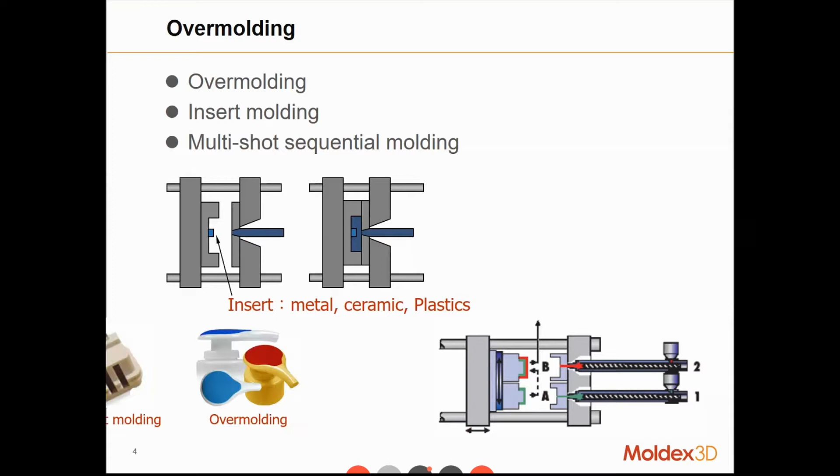Okay, so now let's swing straight to the introduction. So overmolding. In plastic injection, there are actually several nouns: overmolding, insert molding, multi-shot sequential molding. So overmolding normally refers to a plastic part that is injected to cover, or let's say on, another substrate, which is also plastic.

And as for insert molding, normally it refers to a plastic part covering or encapsulating another metal insert. And multi-shot sequential molding is multiple injection that is done continuously to combine two or more components together inside the mold. So strictly speaking, these three are a little bit different.

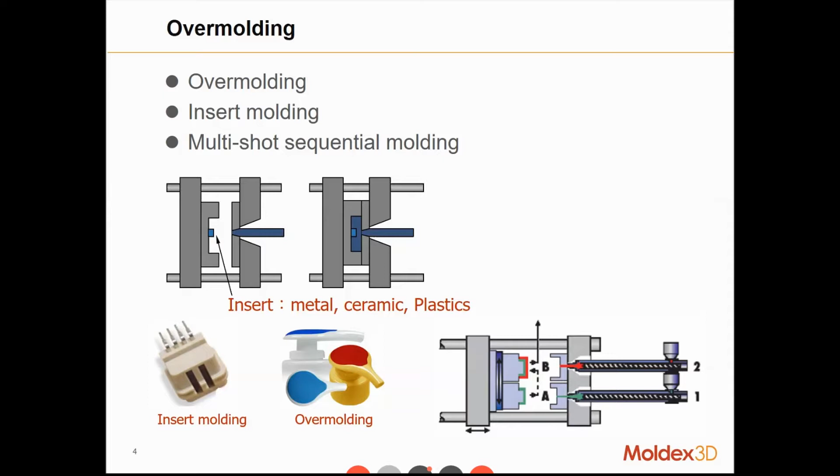But actually, there's also another general standard saying that overmolding actually covers insert molding and multi-shot sequential molding. So for today, we'll be using a little bit more general standard. We'll focus on the plastic substrate and plastic injection. So plastic with plastic insert. Okay.

So now let's take a look at some general examples of multi-component molding products, or let's say overmolding products. So first of all, consumer products like shavers and cosmetic packagings, the bottle of the shampoo, shower gel, all these things that you'll see. And to some bigger parts like the automotive components, the door handle of our cars,

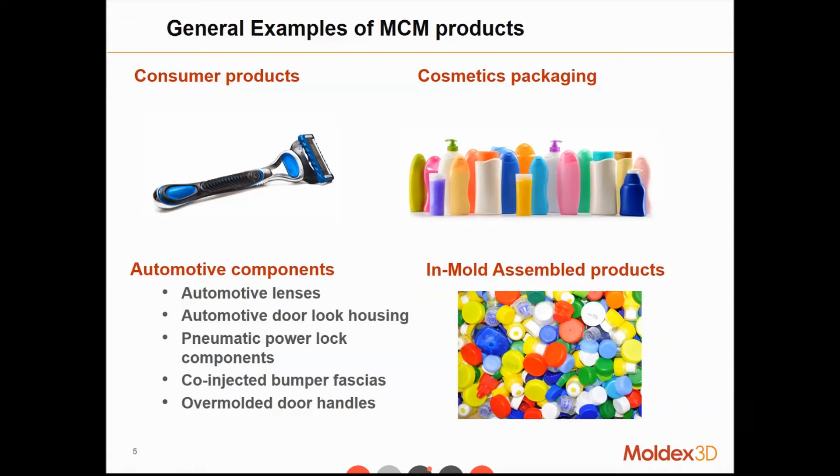maybe our front lamp, and then some in-mold assembled products. It can be medical products, or it can be the toys for our children. Okay, so all these, a lot of our daily objects, they are manufactured by an overmolding process.

So some pros and cons about overmolding. So a good thing about it is it gives us a shorter production time because it reduces the secondary operation. So we don't need manual assembly work. So it also at the same time reduces our labor cost. So it saves our cost money-wise and also time-wise.

And then since we assembled the part inside the mold, it can create a stronger chemical or mechanical bonding between two materials. So if the materials are suitable, they can be remelted and create some chemical bonding. If not, then we can combine them mechanically.

And finally, an overmolded product can give us a better product performance. So for example, let's say it's a screwdriver, and with a rubber-like overmolded part, we can have a better grip of the screwdriver. So it can significantly improve the product performance and make it more user-friendly, easy for our daily job, etc.

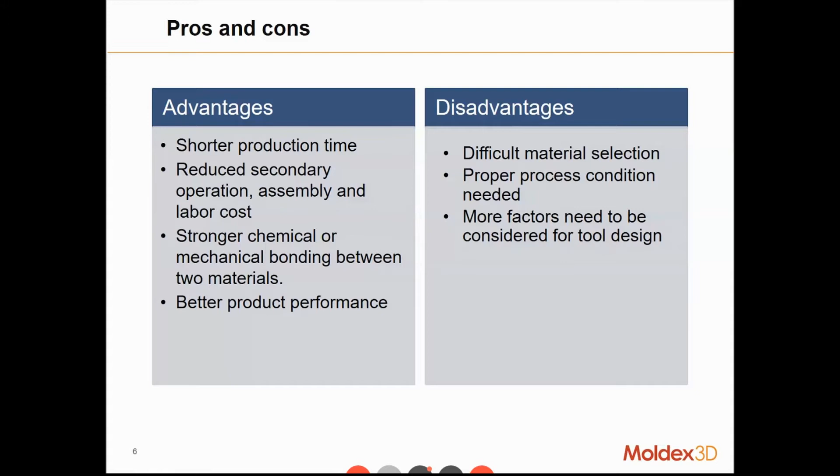So with all these difficulties, sometimes it can be difficult for manufacturers or designers to design and manufacture the product simply based on years of experience. Sometimes it's still very difficult, which is why we need software to help us predict and simulate and perhaps come up with a possible solution for our design. Okay, so which is why we'll go to the Moldex3D MCM module.

So the Moldex3D MCM module has a powerful pre-processing tool for analysis. It has a fully automatic, or semi-automatic, meshing tool, and also the process setup; the whole workflow is quite simple. And then it supports multi-shot analysis, so it's for overmolding, or sometimes more like 2K continuous injection. These we can consider, and no matter if you have a plastic or metal insert, they can be considered in our module.

And after the simulation, we have a remelted zone display that helps us to know what the temperature does to our substrate. And if we need to consider the fluid-solid interaction between the part and our insert, the substrate, we can also run a core shift analysis. So this enables us to know what the second injection does to the first part, whether it's going to cause deformation for our substrate. And finally, we can consider the orthotropic material property.

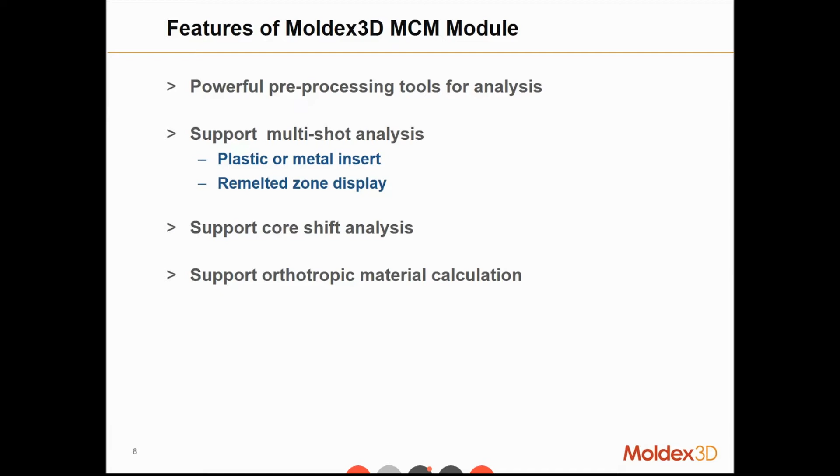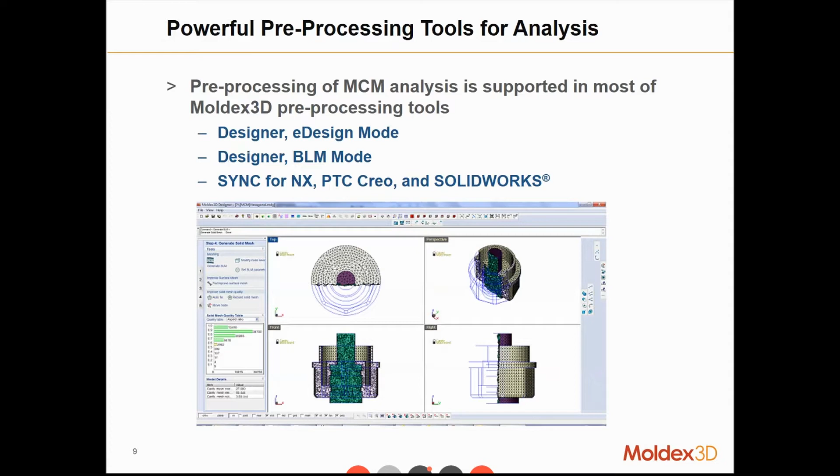So let's take a look at the details about each point. Number one, we have a powerful pre-processing tool. If you already know something about Moldex3D, we have different meshing tools. We have eDesign and BLM, boundary layer mesh, and both meshes support the multi-component molding, overmolding process. And if you want to do the pre-processing in your CAD software, the SYNC for NX, for SolidWorks, for Creo, they all support multi-component molding. And the whole workflow is pretty user-friendly and very straightforward.

So when we talk about the meshing part, for overmolding, we have Moldex3D non-matching mesh technology. So for your insert or substrate, the surface mesh and solid mesh don't have to be completely matched with your part or your second shot. This non-matching mesh technique can significantly reduce our meshing time, because if your product design is very complicated, it can be quite difficult to completely match the insert and the part. We do have an automatic matching technique, but for an extremely complicated part, especially in some small feature regions, it can be difficult to completely match everything, which is why we have this non-matching technique to shorten the pre-processing time.

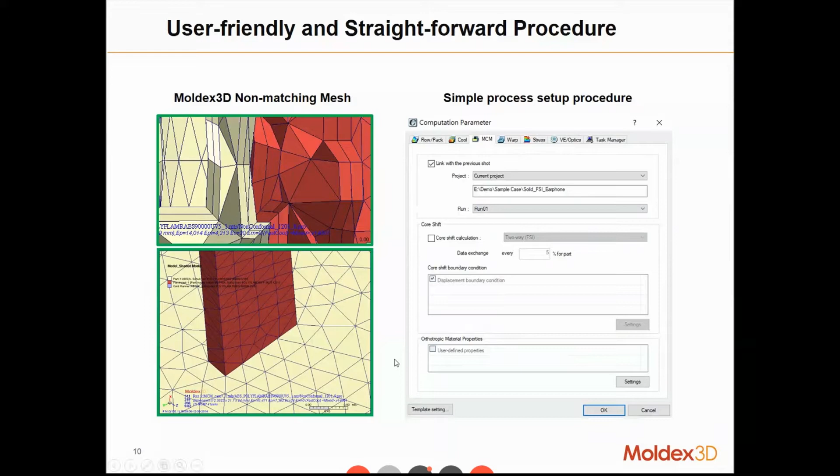And also in the process setup, we have one single window for the MCM process, so we can easily link the multiple shots. We can link the second shot with the previous shot, and we can get the data from the previous shot. Later on we'll have a little bit more detail about this point. And if you want to run core shift, it's also in the same setup page. So the whole workflow is quite simple. You can basically set up the MCM process in just one single platform.

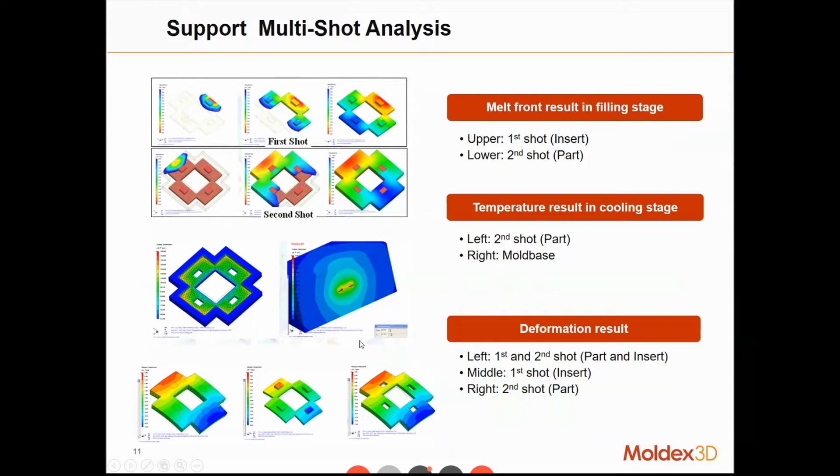So like I said, the MCM module supports multi-shot analysis. For filling, we can simulate the filling behavior and the flow pattern of our first shot, and then continue the second shot with the already made analysis as our insert for the second shot. Sometimes we'll be able to observe a little bit of flow difference with or without considering the first shot. And not just in filling, also in the cooling stage, since we can get the temperature result of the first shot, we'll be able to spot some temperature difference in the part and also inside the mold base in the cooling analysis. And finally, since we have a different filling pattern and different temperature, in the end we can see a little bit of difference in the deformation, the warpage result.

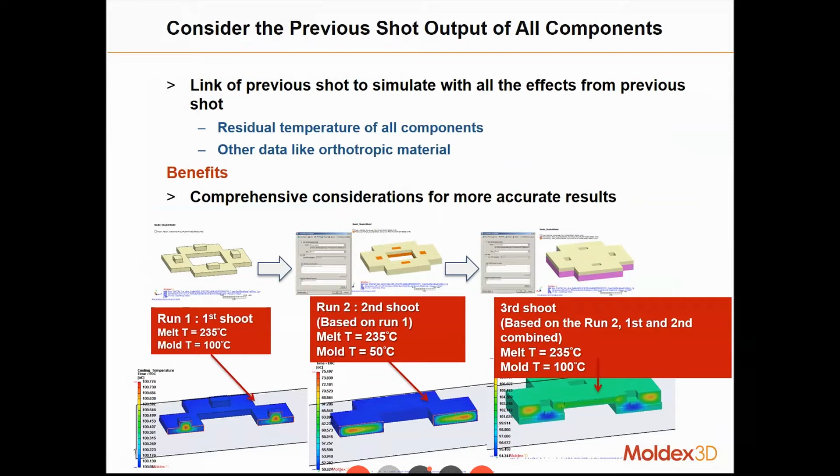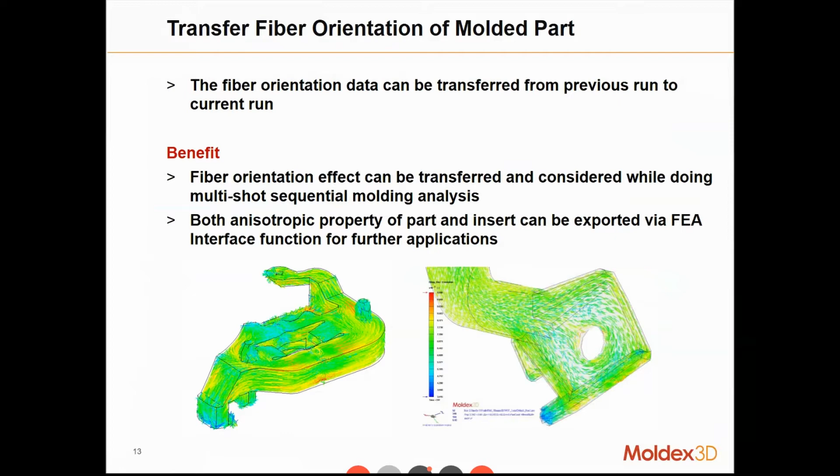And not just the temperature, but if you have some orthotropic material property, like different modulus in each direction, or if you're using a fiber reinforced material, the fiber orientation can be passed on. In the next page, I'll show you. The fiber orientation result can also be transferred to the second shot. These might later influence the deformation of the whole part after the part and the insert, the substrate, are ejected from the mold. And then both parts can be exported into FEA software to run a further structural analysis.

Okay, sorry, let's go back to this page. So up until here, we're talking about temperature exchange, heat exchange, and also some orthotropic material property. And all these can be done with a simple non-matching mesh technique. But of course, in order to achieve a good simulation quality, even though we're using a non-matching technique, we strongly suggest our users to maintain a similar mesh size between the part and the part insert.

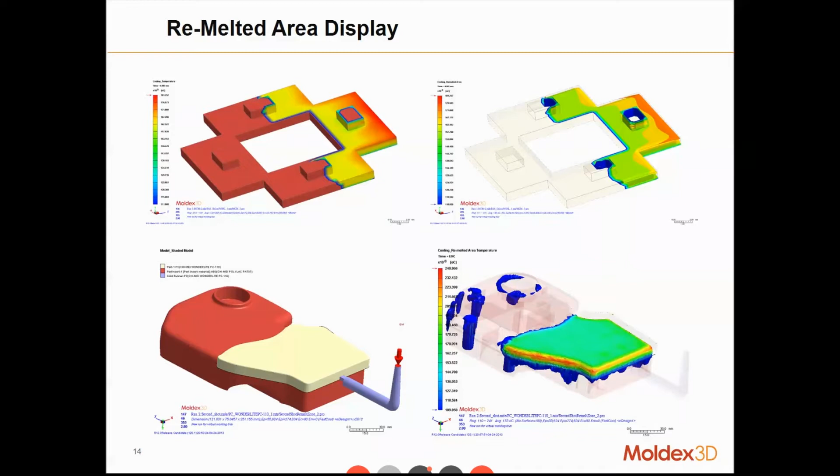Now, that's for non-matching. But if we want to run a core shift analysis to understand the fluid-solid interaction between the injected part and the part insert, then we will suggest our users to use a fully matching mesh, in order to handle this very complicated, complex fluid and solid interaction.

Okay, so it can be a metal insert like this earphone jack, or plastic to plastic part like a lot of medical parts, or even IC packaging if we want to consider the deformation of the lead frame. We'll suggest users to use a fully matching mesh, but we will not focus on the core shift part for today.

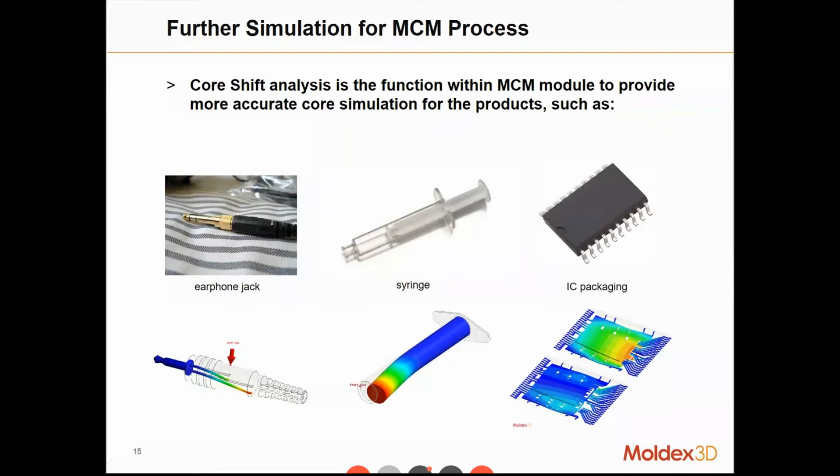Okay, so these are the capabilities of our MCM module and what we can do to help you simulate an overmolding process. So now I would like to share with you a few successful cases from our users, from our customers. So number one is the case from TomTom.

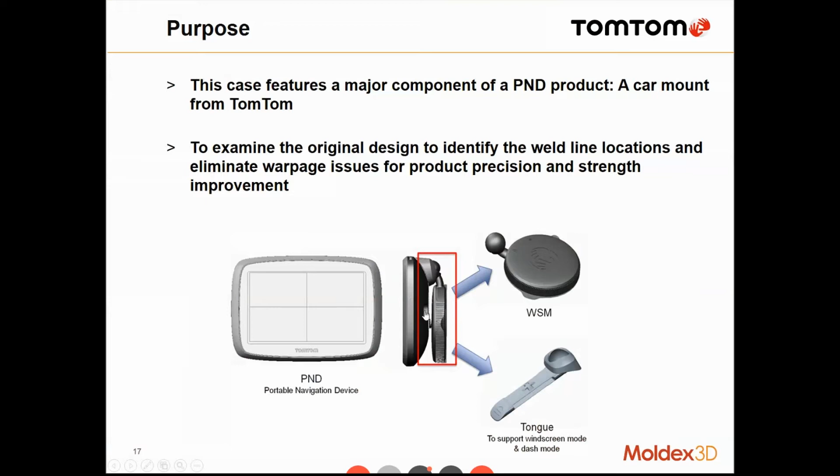Okay, they have this navigation device, and the product that they are going to simulate is what they call a tongue. This one comes with a small socket over here where we can put a ball bearing inside, and it can support this navigation panel. And on the other side, it will be attached to either your window or the air conditioner.

Okay, so in the original design, they use a simple one-shot injection. When we look at the frozen layer ratio, they have an extremely low frozen layer ratio on this socket region, which means at the end of the packing stage, most of the melt over here is still in a molten stage. So in this region we might have some potential high volumetric shrinkage, and in the end, it will cause some product defect, probably visible with our bare eyes.

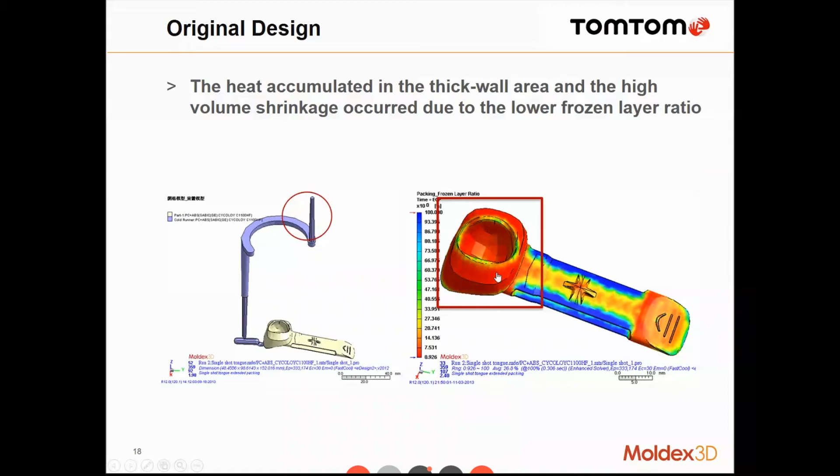Okay, so when we look at the sink mark result, we have a very high risk of sink mark in these regions, especially inside this socket for the ball bearing. And this will cause some tolerance issue. If we have some sink mark over here, when we put the ball bearing inside, it might be a little bit loose, and so we won't have a strong support.

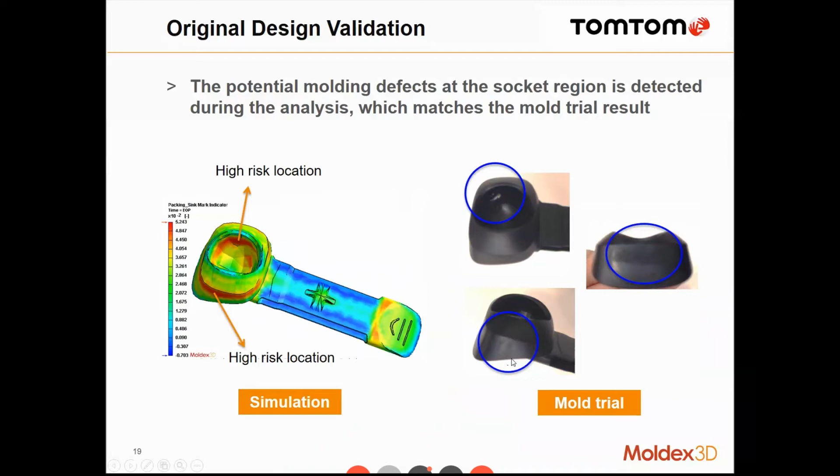Now, if we look at the real product, as you can see over here and over here, they do have some visible sink mark in their mold trial. So then they come up with a revised design. Since the socket region has an extremely high thickness, they tried to separate it into two shots. The first shot will be this tongue, and the second shot will be this ball socket.

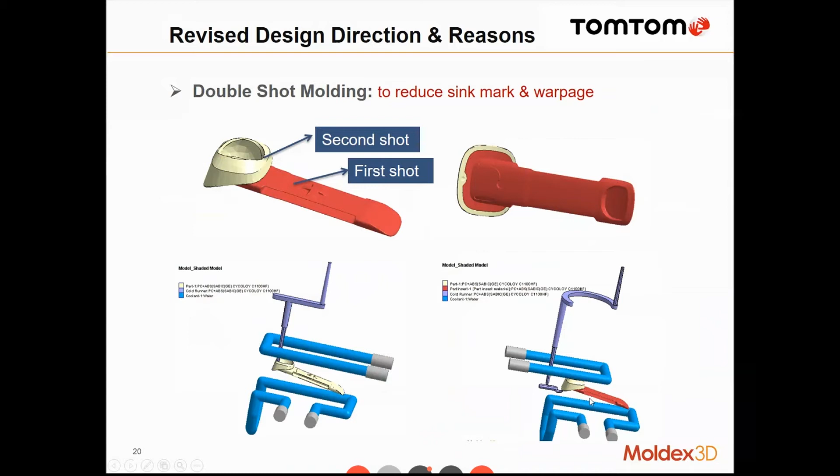And as you can see, this is the design for the first and the second shot. Okay. Now the first shot is okay, but when we look at the second shot, we'll be able to see some potential weld line over here in the middle, since the injection point is over here. So the two melts will meet exactly in the middle on the opposite side of the gate.

If we look at the temperature, it's actually within an acceptable range. But when we look at the weld line meeting angle, we have a very poor weld line meeting angle, which means these two melt fronts meet each other when they're basically parallel. Okay, so with this poor weld line meeting angle, we might have a visible weld line, and also the mechanical strength will be influenced, so we'll have a higher risk of crack.

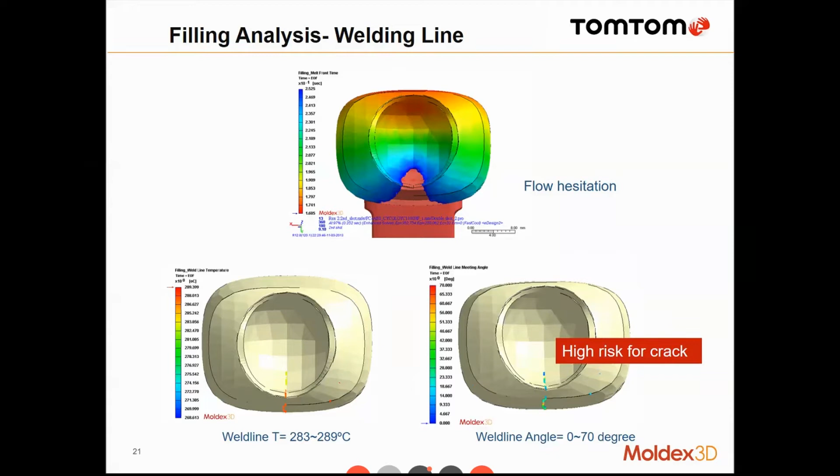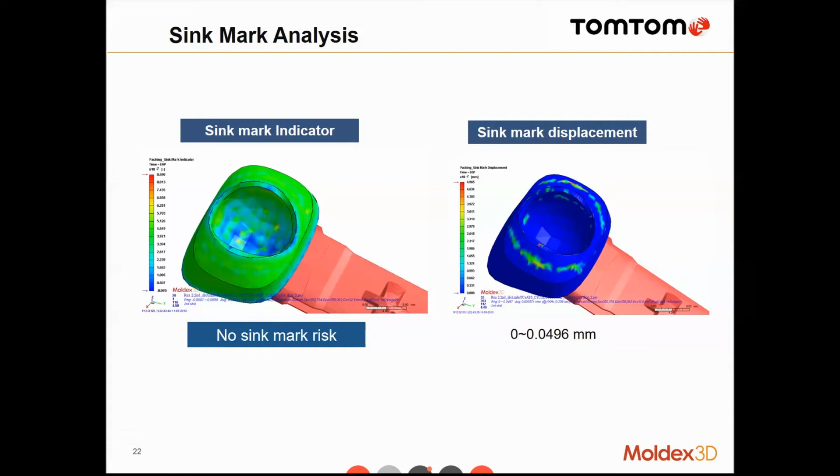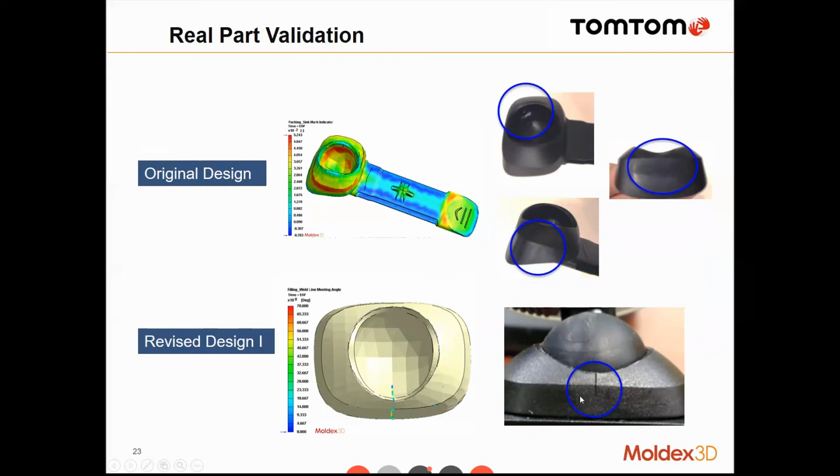Now what's left is the weld line issue on the opposite side of the gate over here. As you can see, for the real part, there's an extremely obvious weld line over here, and it might potentially crack after a period of time.

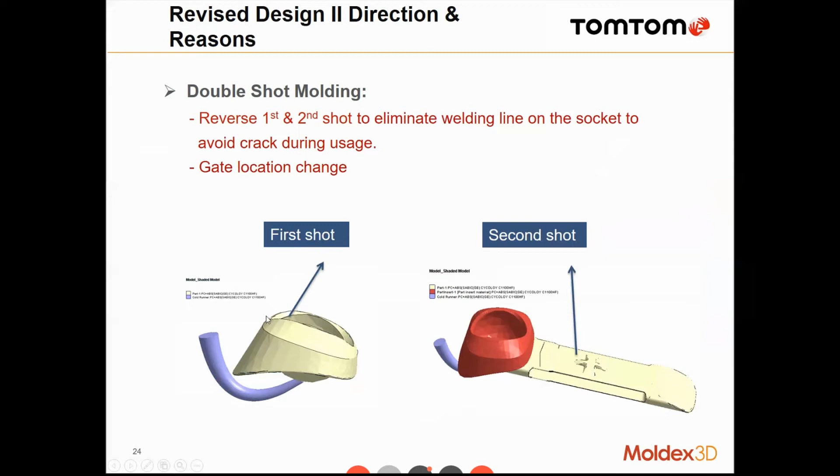So then they came up with another revised design, number 2, which uses a different sequence. They inject the socket first and then the tongue as a second shot, and they put the gate exactly in the middle of the socket. So ideally the melt front will go evenly to both edges and there won't be any weld line.

So if we look at the filling pattern, as you can see, there won't be any visible weld line for the socket. And even though there might be a little mark on the gate side, since we'll inject the tongue, and this is an assembled part, on the surface we will not see any defect.

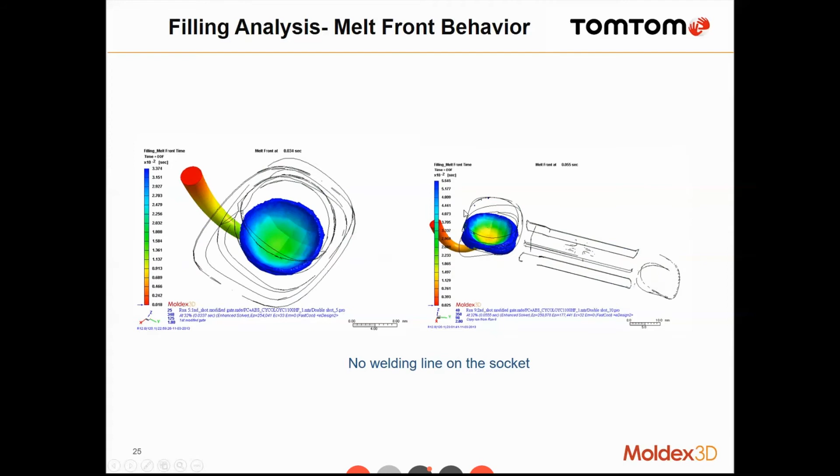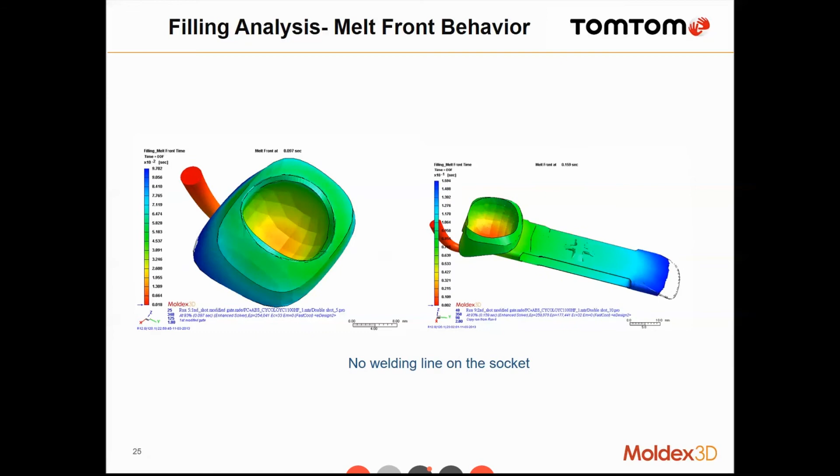So now they have solved the weld line issue, they have solved the sink mark issue, and the gate location is hidden on the inside. So basically, with MCM simulation, they have solved all the existing issues for this part. And finally, we just need to double check the warpage.

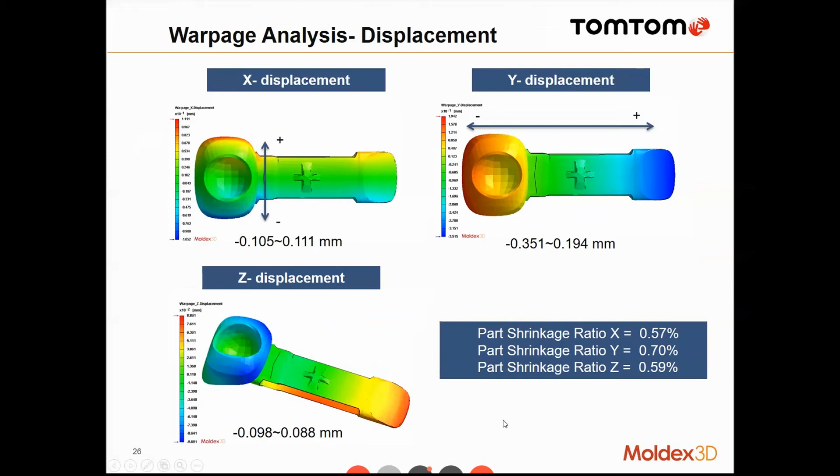So this is the displacement of the final design, and all the linear shrinkage is within a reasonable range for the material. So we can say that the product should have pretty good quality and be within the requirement.

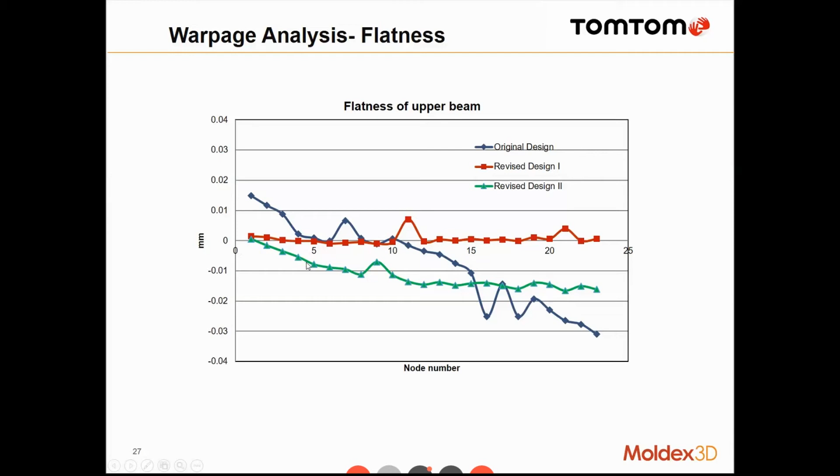And also, if we look at the flatness of the tongue of the real part, the original design has a wider range of flatness, as you can see. And with the 2 revised designs, since we separate them into 2 different shots, the flatness of the tongue is greatly improved.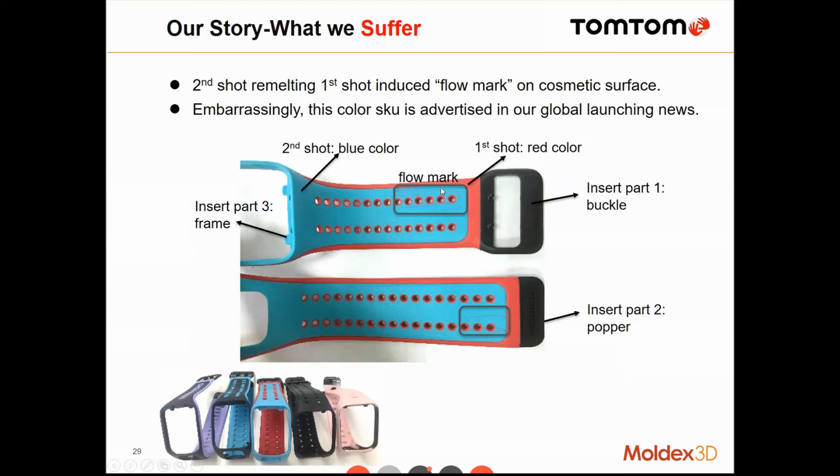Okay, so they came up with several different simulation variables, several possible solutions. Number 1 is with 2 different thicknesses of the second part. Then they tried different gate sizes and different gate locations, and after different types of product and tool design, they also came up with a possible solution from a manufacturing point of view, which is the flow rate profile. So they tried to solve the problem with a different flow rate setting.

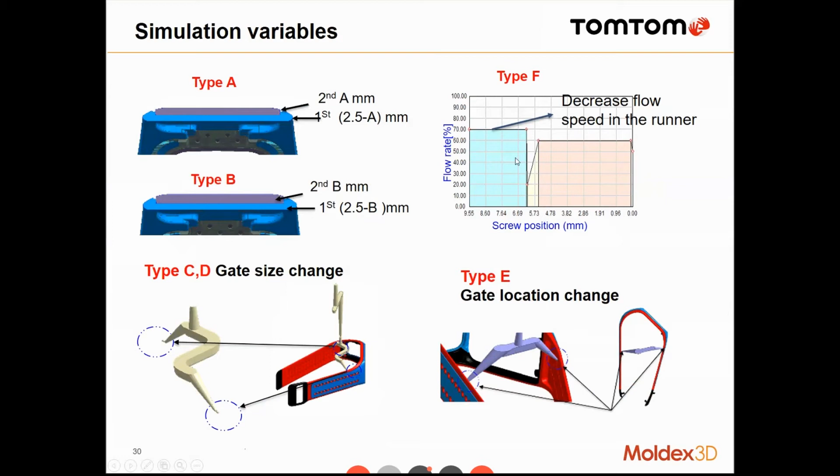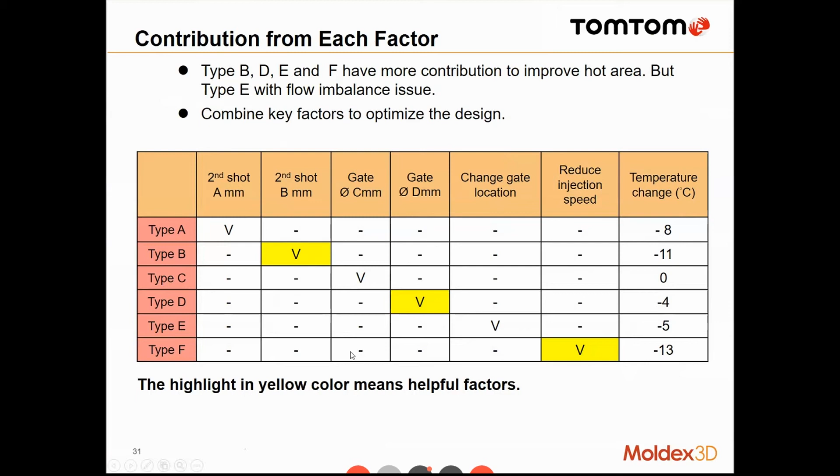With different variables, they got different temperatures of their part, and in the end they concluded that a thicker part for the second shot, a larger gate, and a lower injection speed can be quite helpful. So they combined all these three factors and came up with an optimized design.

As you can see, in the original design, this is the region that has higher temperature, which means a potentially remelted region and also higher shear stress. With higher shear stress, a higher risk of flow mark. As for the optimized design, the temperature has decreased by more than 20 degrees Celsius in these regions.

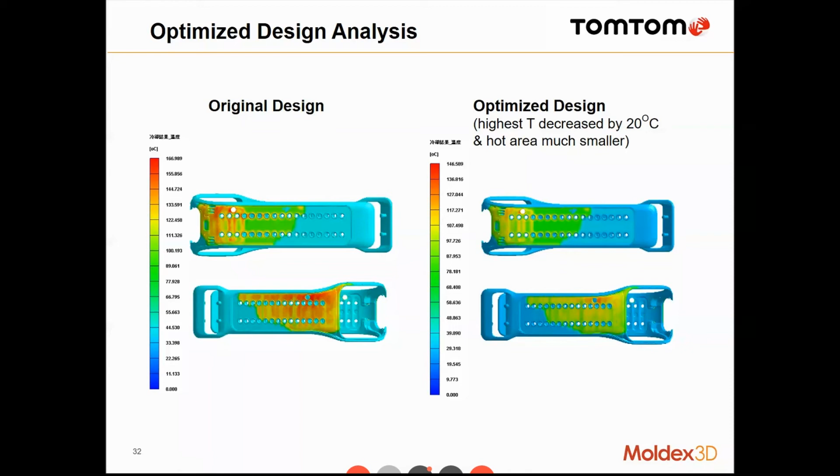And judging by the color, we can also tell that the temperature distribution in this potentially remelted region is more uniform. So not just is the temperature lower in general, but the distribution is a lot more uniform. So judging by the temperature, we can predict a much lower risk of flow mark.

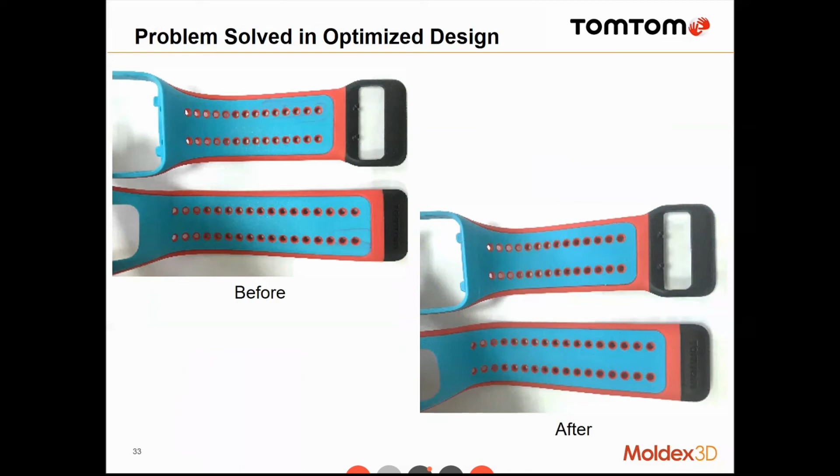So then, based on the simulation result, they modified their tool design and the process, and in the end, this is the final product. The original design gives them a very obvious and visible flow mark over here and on the other side of the belt. Now with the optimized design, on the right, there is no longer any visible flow mark on the watch belt. So they have successfully solved the flow mark issue.

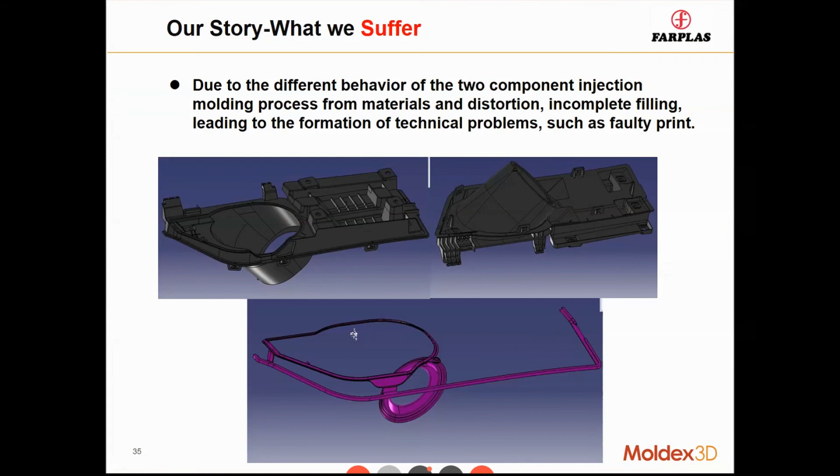Okay, and this will be the last case for today. I would like to share with you one case from Farplas. This is a very typical overmolding part. So on top, we have the first shot with a PP material with fiber. And at the bottom, we have an EPDM, and that provides a sealing for the first part. Okay, so it's on these edges, and later on, when this is assembled with another part, this provides the sealing.

Okay, so the difficulty they are facing is actually precise dimension for the first part, but more importantly, the filling, which is the short shot issue for their second part. So in order to have a proper filling pressure to prevent flash, they find it difficult to completely fill the part. So they have to fix the short shot issue.

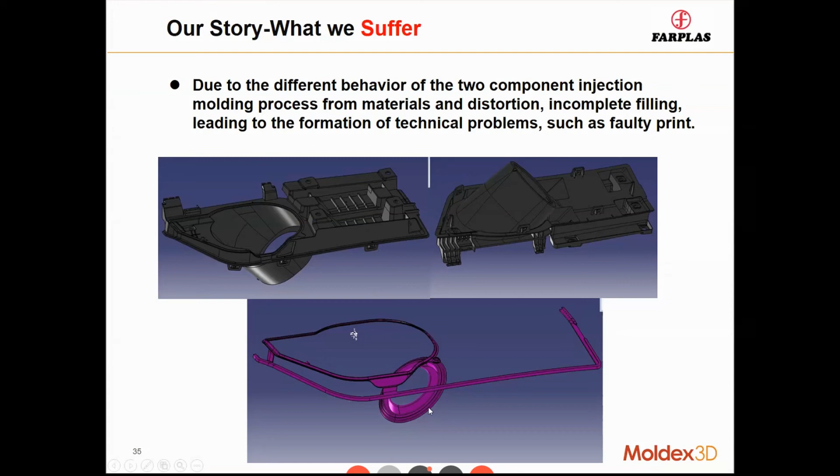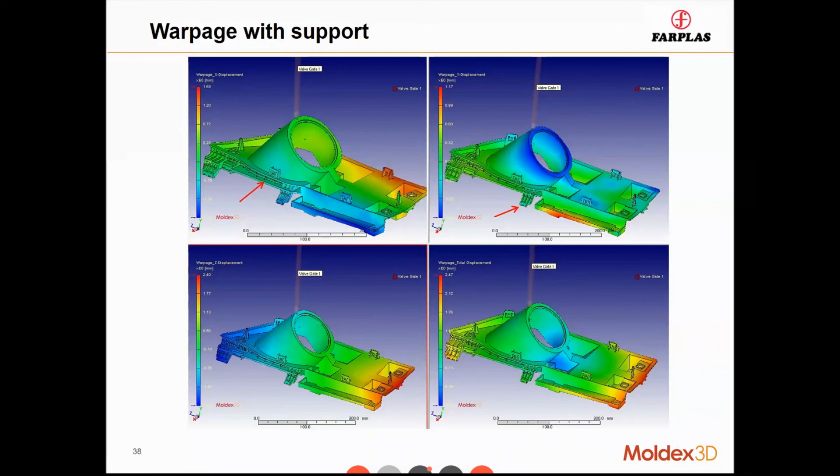2.78. Okay, and then another design is multiple ribs in between this gap, and in the end, the total displacement is about 2.47, which is about 10% lower than the original design without any ribs. So in the end, they go for this design with some ribs. So now they have decided the design for the first part, and then they move on to the second injection, which is the EPDM injection. Okay, so this is the original design for this sealing for the overmolded part.

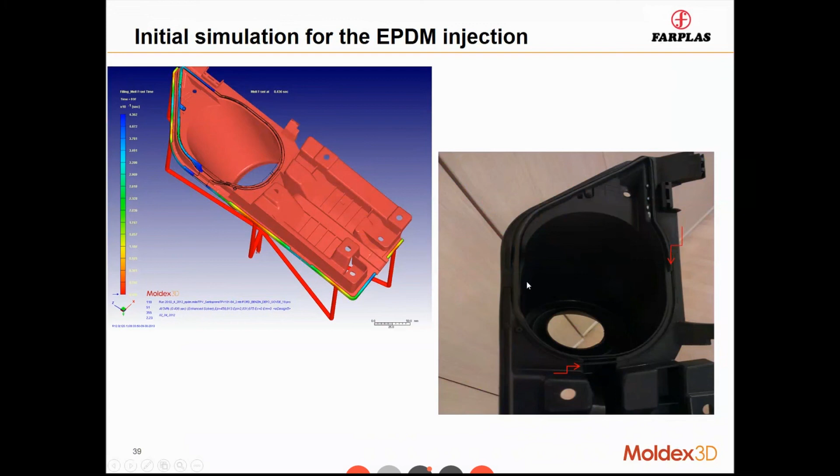At the end of the filling analysis, as you can see, we have short shot, and the melt front stops over here and here. And on the right, we have the real mold trial, which is the product that they have problem with. And as you can see, we have two red arrows pointing at the end of the melt front. So it's over here and here. And basically it matched with our simulation result perfectly.

Okay. So then they come up with different thickness for their EPDM part. Because they figure in order to maintain a proper injection pressure, they can somehow increase the thickness to make it easier for the melt to flow in the cavity. So all they need to do is to get rid of some extra material for the first part a little bit, and then with a larger thickness on the side and also on the bottom, they might be able to fill the EPDM part.

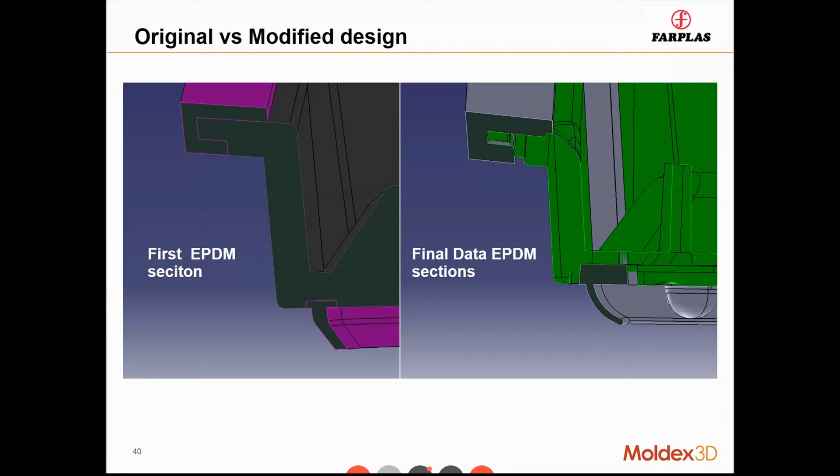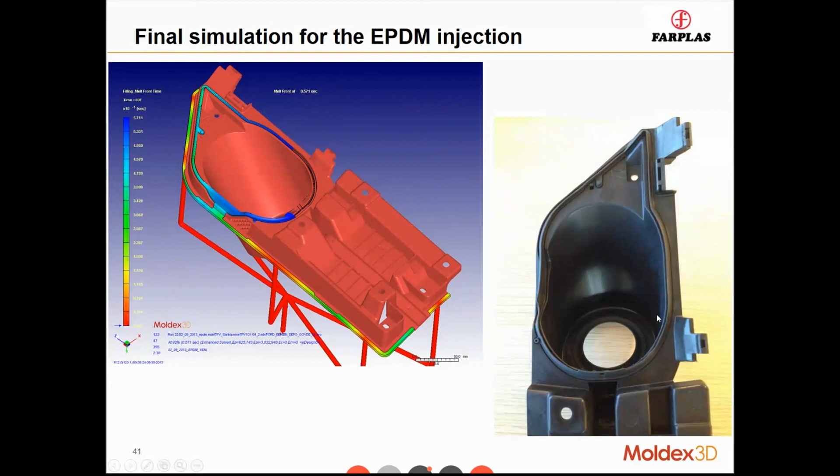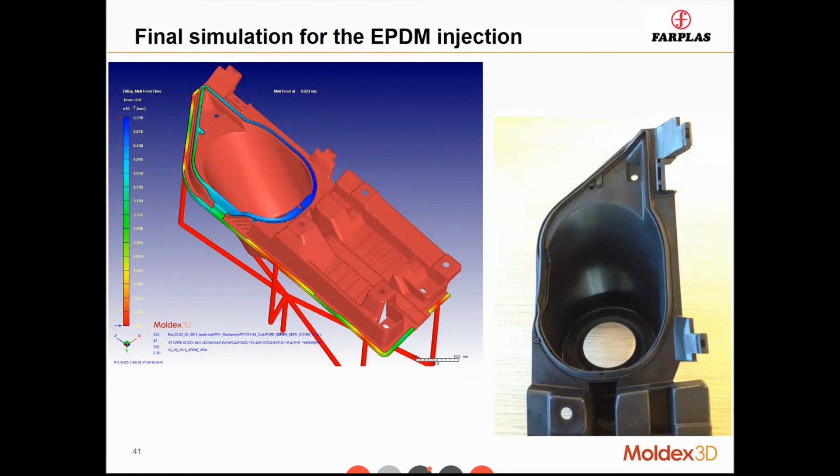Okay, so with a revised design of the second shot, they run another filling analysis, and this time with the same setting, they are able to fill the cavity completely. So based on the simulation result, they modify the tool, and finally they come up with a product with a complete sealing on the substrate over here, as you can see on the right. Okay, so with filling analysis, Moldex3D helps Farplas to solve a dimensional issue and also a short shot issue for the EPDM injection.

Okay, so now the conclusion for today. Moldex3D MCM module simulates a multiple component molding process, including insert molding, overmolding, or multiple shot, 2K or even more shots molding. And between each simulation, the temperature and fiber information of the previous shot can be transferred to the second simulation. So the temperature distribution and the orthotropic material property will be considered in the second or even the third shot of our injection.

And then for the substrate, we have a potential remelted zone that can be visualized in order to predict a proper chemical strength or mechanical strength, or on the other hand, predict some potential surface defects. And finally, with different temperature and different material orthotropic property, it gives us a different warpage. So that can also be considered in our simulation. So we'll predict the warpage due to a property mismatch of different materials, prolonged cooling time, and some unsymmetrical shrinkage based on our part design.